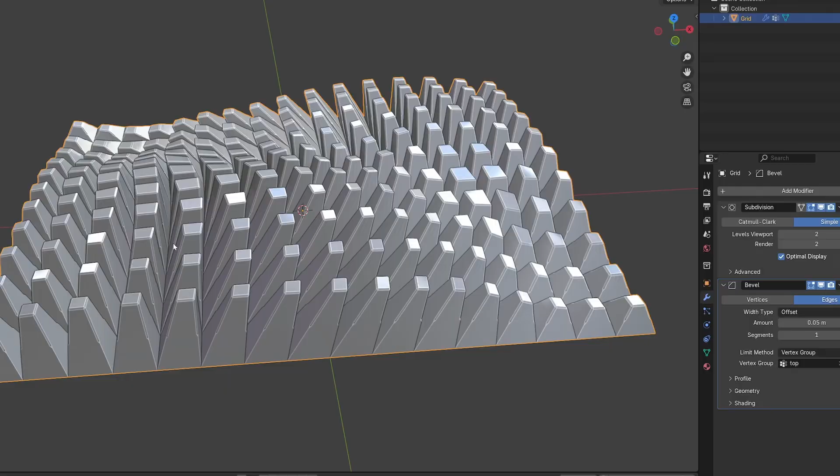This is part 2 of my DIY 3D printable wall art design made in Blender. To see the entire Blender workflow, watch part 1 linked in the pinned comment and video description. In the first tutorial I created this in Blender. Now let's finish this up inside of Blender, prepare, export, slice, 3D print and finish this wall art / sound diffuser panel.

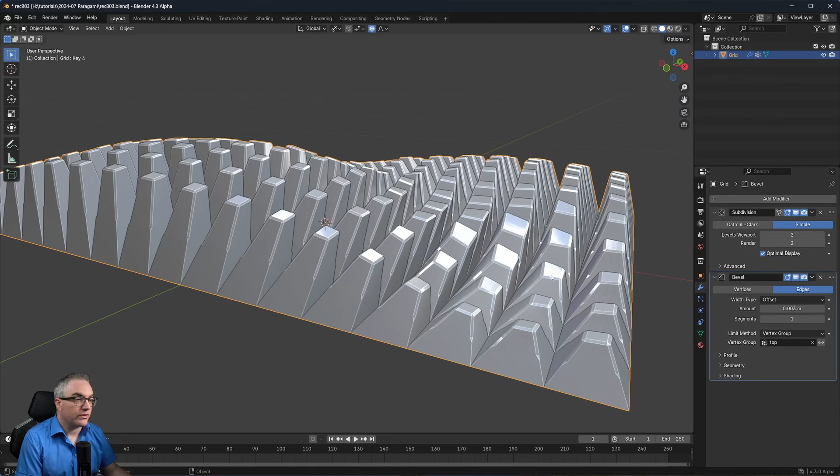Okay, this is what I have from the last tutorial. Before we start cutting this and preparing everything for 3D printing, I want to change a few things around. First, if I switch on wireframe here, you can see that this bevel going down only halfway kind of messes up this geometry. I don't like it. I'm just going to put the bevel on the top only, so I move the bevel to the top.

And I keep this on vertex group just at the top. Then the subdivisions we can crank up to 3.

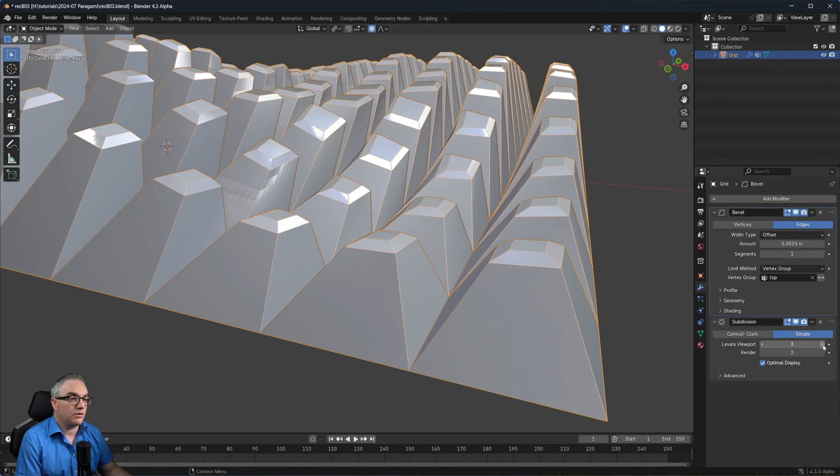Next thing I want to do, I want to go through the shape keys real quick and see what we got. So the first shape key is this hill here. Let's bring this up to, this looks good.

The second shape key was this one here, I think. This could be a little taller too. Look at it from the front. Yeah, something like that. Then the third one was taking away some out of the middle here, or going diagonally here. I think I'm gonna edit this one a little bit.

Okay, so let's see, we got this and then we have some in the middle. So if we go into edit mode, for example this one, maybe even the one on the end here, this one, there's some stuff sticking up here.

Okay, let's take these, and then with proportional editing, we go G, Z, maybe make this a little smaller. Okay, like that. And that should give us a better result here. I had some stuff sticking out here that I didn't like, and now it looks a little bit more uniform, I think.

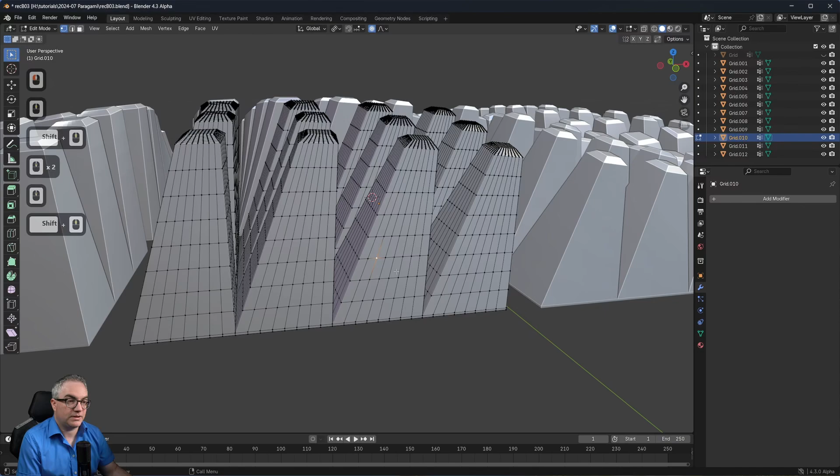Well, how about we select this, and let's see, we go mesh, clean up, merge by distance. So it should merge these vertices where we have several in one spot, down here, and merge this into one. So if I select one vertex now and hit Ctrl L, it's selecting the entire chunk.

Now we have to do this to all of these, and that's really easy because we can select all of these and go into edit mode for all of them: select all, mesh, cleanup, merge by distance. So if I go over here, Ctrl L, this is now a solid chunk. Okay, cool.

However, if we think about this, now we merged these vertices by distance, but I think we're gonna end up with internal faces here. So let's look inside. And yes, we have internal faces here. So between this spike and this spike, down here, we have an internal face, which you can see.

How can I make this so we can see it? You can zoom in like this. And then there's this face in here, right? This shouldn't be in here. There should be a continuous volume and no faces dividing the different spikes. So how do we fix this?

Well, we just go to mesh, now we go to select interior faces. Well, that's that. Okay, and it selected all of them since I'm in edit mode for all of the objects at the same time. So let's check it out. Here we can see the internal faces.

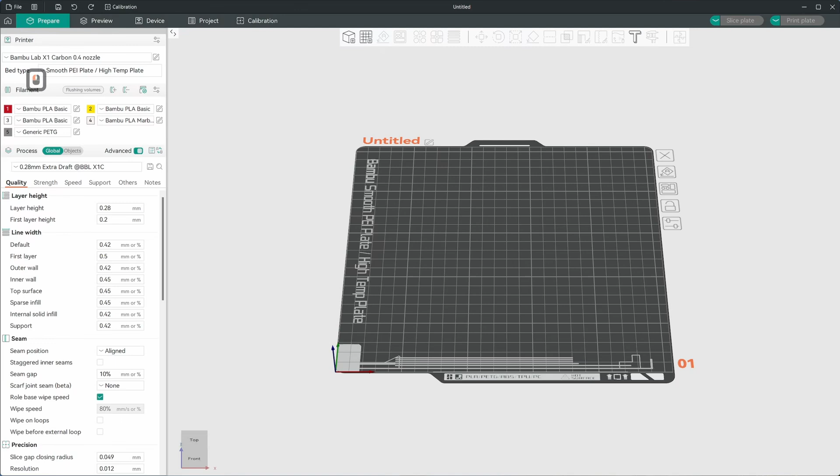Export print 3 STL. Okay, now let's jump over to Orca Slicer. Here I am in Orca Slicer, and I'm just gonna drag and drop print3.stl, which I just created. Of course, this is now too big, but this is one object, and I can just hit number 4 on the keyboard to assign the 4th material in my AMS, which is the white marble that Bambu Lab sent over for this project. Thanks again to Bambu Lab.

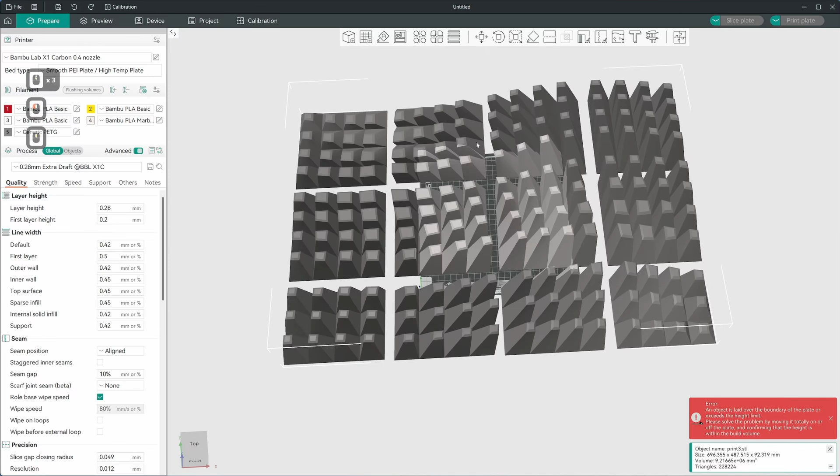Okay, now how do we put these onto separate print plates? Well, that's really easy. We right click, split objects, and then the slicer rips this apart into individual objects. So we just have one STL file, we didn't have to export 12 times. We just did one export from Blender, and now we ripped it apart inside the slicer.

Let's see if all the objects are good, or if we have anything dangling around. No, this seems pretty good.

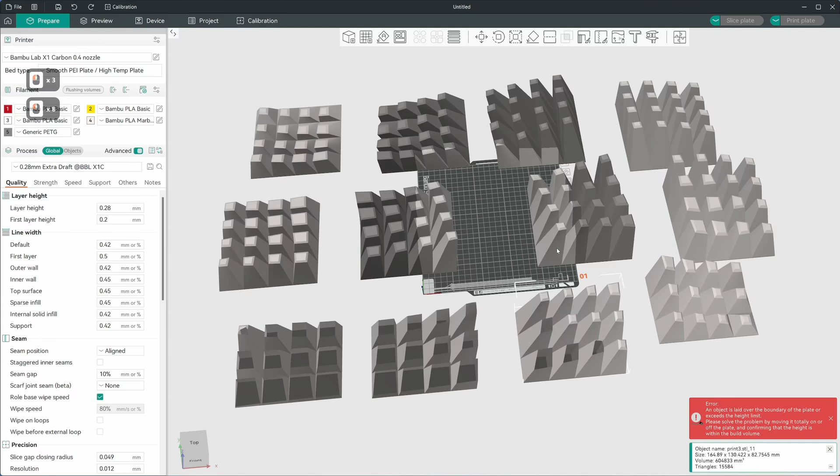Now how do we arrange this? Also very easy. Orca Slicer has this awesome button, which is auto arrange. You just click arrange, and then it creates 12, or actually 11, individual print plates. Why 11? Because it put these two onto here.

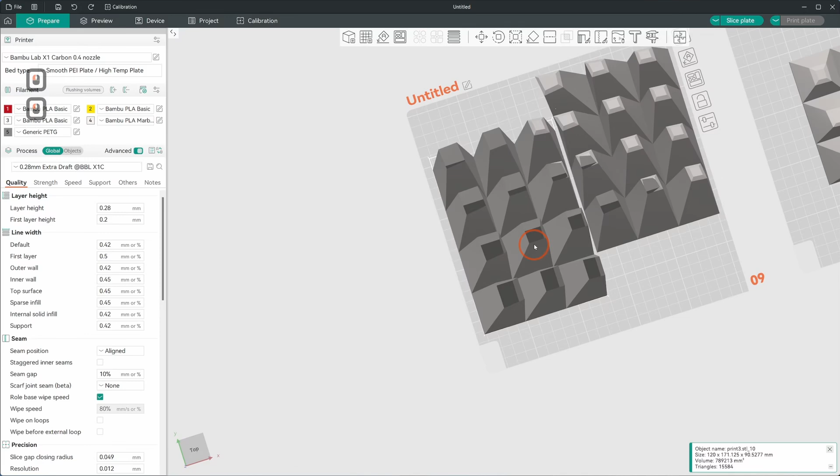Okay, this is awesome. I think we can optimize this a little, because the slicer always puts it right onto the edge, which I don't like. I'm gonna go like this probably, just bring it in a little bit. They can be closer here, and then they're not all the way out to the very edge of the print bed.

Okay, now this is already ready for slicing. So what are the slicing settings I'm gonna use? I already have the white marble. I'm gonna use 0.28, which is the extra draft layer height. So I'm using the tallest layer height for the 0.4 nozzle.

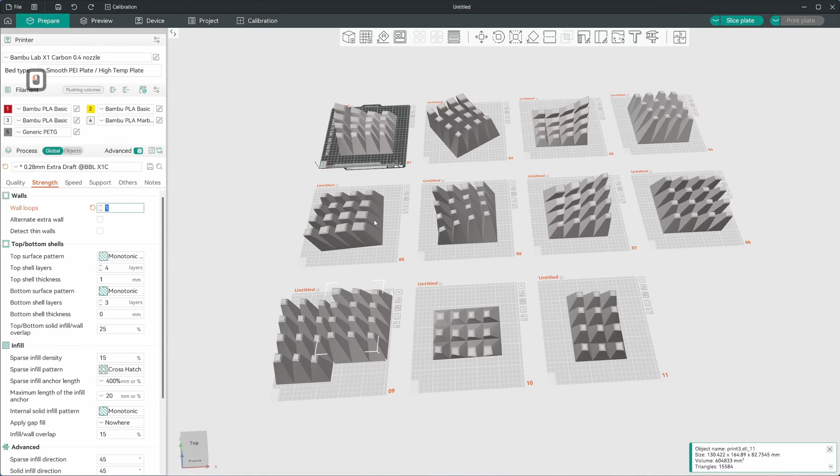Then I think I'm gonna use one wall loop just to print just the outer wall, almost like vase mode. I just want one perimeter. And then let's see what else. Well, let's just try slicing one plate here.

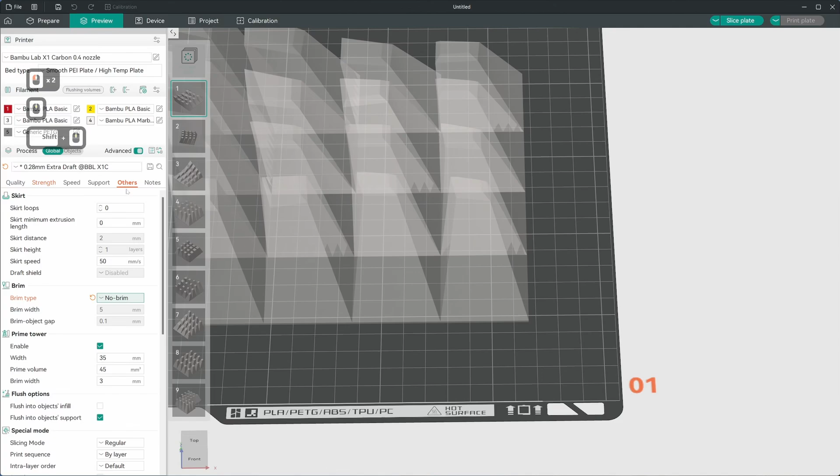So let's take this one, slice plate, and see what we get. Okay, so first of all, we really don't need the brim. Brim type, no brim, which is in the others section here. Let's slice again, so we're gonna get this base.

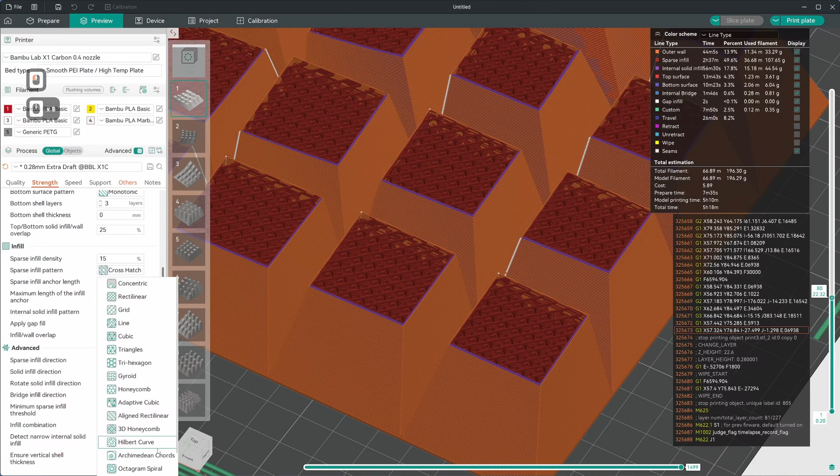And then the spikes start. We have all of this infill. We don't need this. This is way too much filament, and it also takes way too long to print. We really don't need any infill. We only have one outer wall loop, and then we can set the infill sparse pattern to lightning.

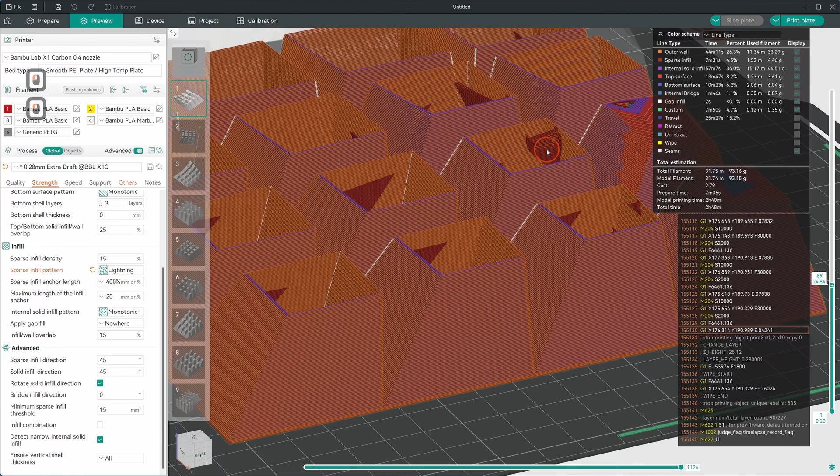So what does that look like? This is a really cool infill type, especially for stuff like this. It basically prints hollow spikes now. As you can see over here, it starts printing this stuff that looks like lightning. And it builds up these internal support structures, so that it can support the top and lay the top onto that support structure.

But other than that, all of these spikes are now hollow. So this is the least amount of infill, the least amount of filament, and also the least amount of weight that we can generate here.

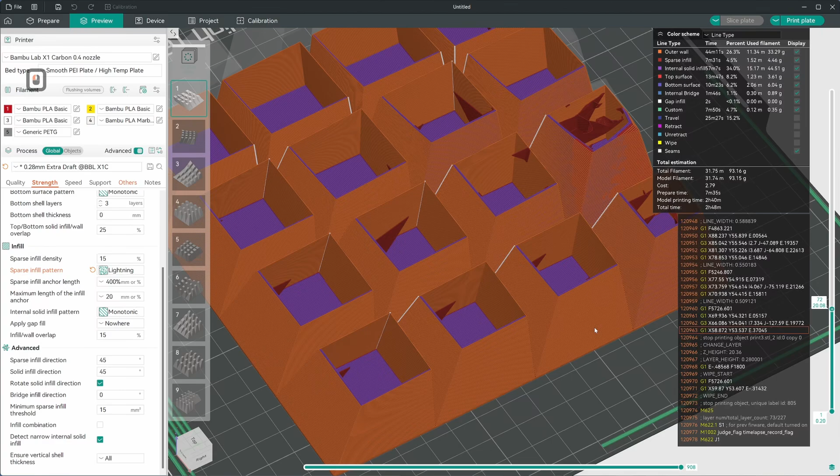However, there's one thing I want to try here, and that is printing this with fuzzy skin on the contour. I have never tried fuzzy skin with just one perimeter, so I made a test print. It came out great. It's extremely lightweight, uses an absolute minimum amount of filament. The fuzzy skin not only hides the layer lines, but also gives it this really nice surface texture. And I'm sure printed in Bambu Lab's white marble PLA, this is gonna look fantastic.

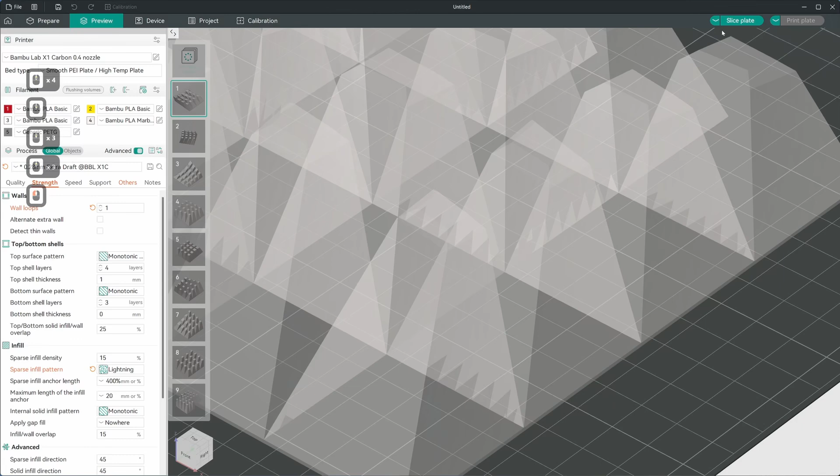So I enable fuzzy skin contour, no brim, and over here I just print one wall loop and lightning infill. And these are my settings for printing this.

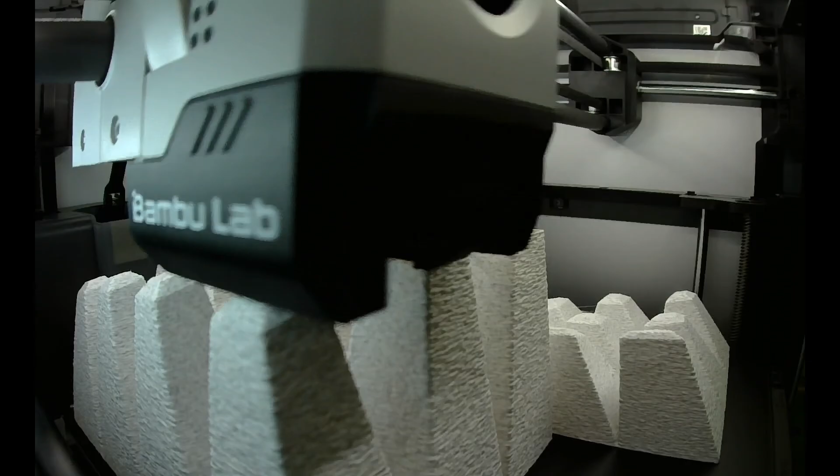So here is my Blender made wall art / sound diffuser panel, which is 70 by 50 centimeters and has 176 3D printed spikes on it. Designing this in Blender was a lot of fun. If you haven't seen that video yet, do check it out on the other channel.

Link is below. Printing on the Bambu Lab X1 Carbon went mostly without hassle, but almost 180 of those spikes with fuzzy skin did take a total of about 40 hours printing time. Even on the blazing fast X1, especially the fuzzy skin is much slower than just straight lines. But it's totally worth it.

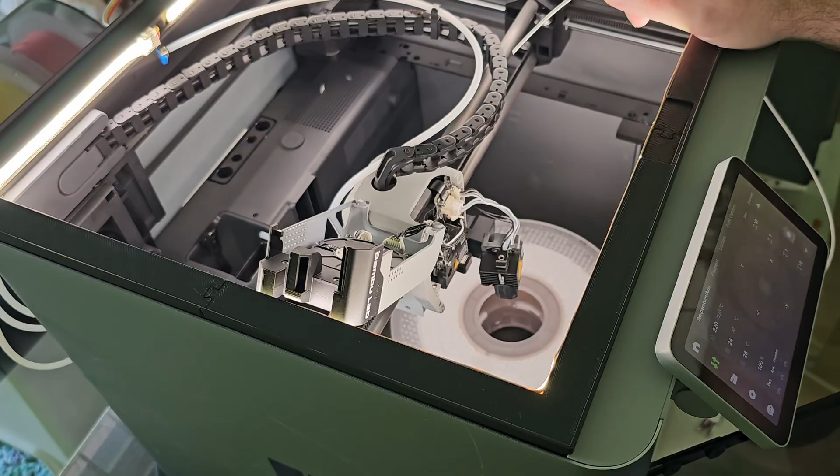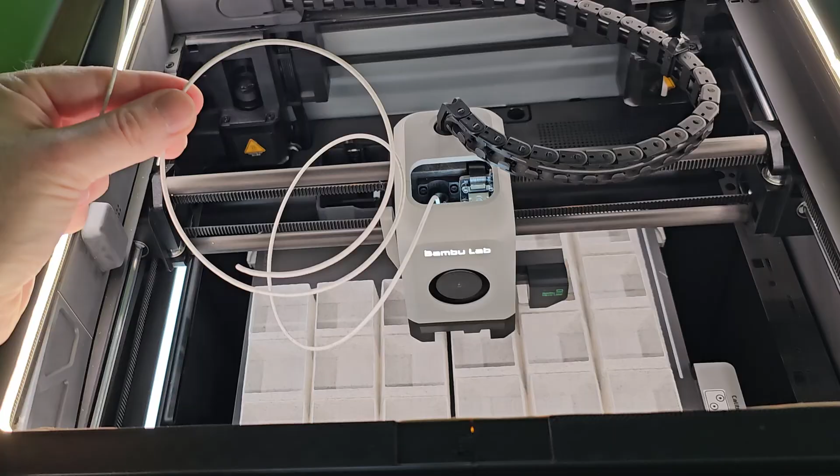After printing 2 build plates without any issues, the third plate failed with a nasty nozzle clog, and after fixing that, I switched to the 0.6mm nozzle, thinking maybe the marble filament with the darker particles inside had something to do with the clog. With the 0.6 nozzle, the other 9 build plates printed beautifully and faster.

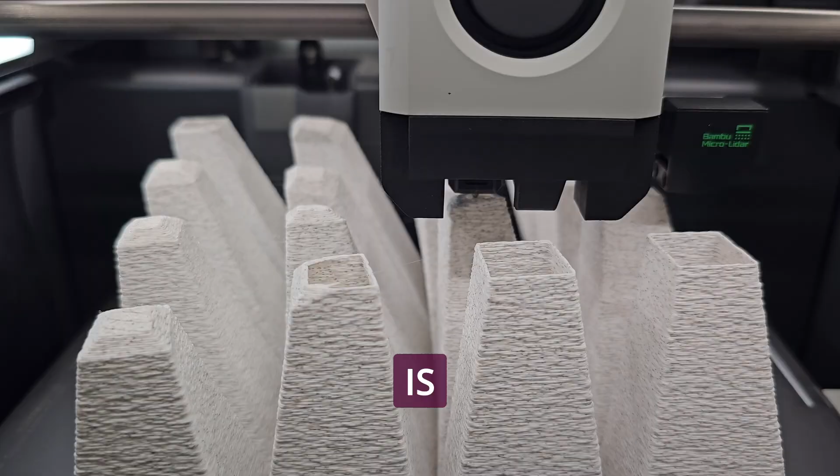Another interesting stat: out of 40 hours of printing, about 4 hours is just travel, where the print head moves from one area to another. And it does that at extreme speeds, by the way. But still, 10% of the time is just travel. And this is now only 1,400 grams of filament due to just one perimeter and lightning infill.

By the way, I simply used regular all-purpose glue to stick the PLA pieces to the canvas.